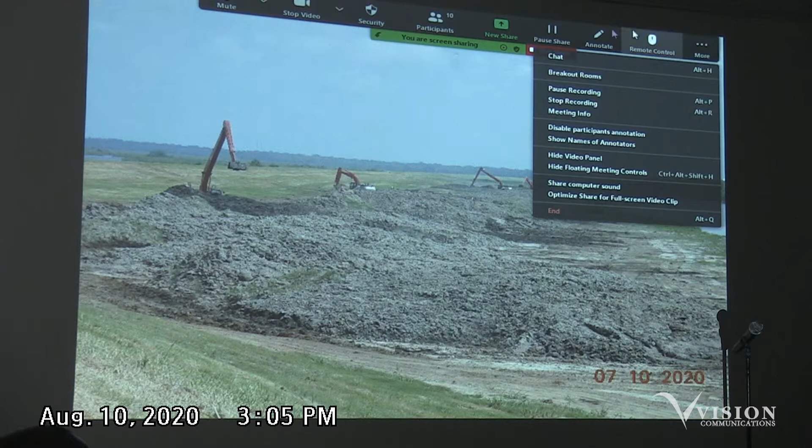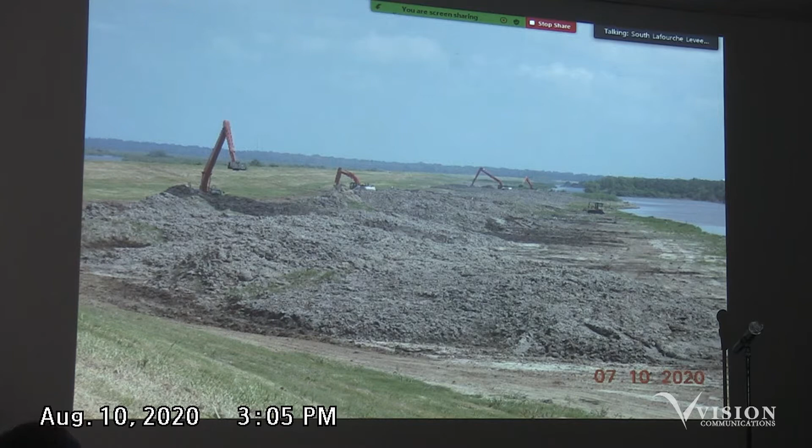Looking at that August 15th deadline, trying to get all the work we can. Here's a big job north of pump station number 2 Basin, where we're going to raise the levee. Some places are just 13 feet high, and we're going to eventually have them at 18. GIS is doing the work. We have a lot of dirt getting close to the levee, they haven't gotten it quite on top, but if we need to in a jam, we can get some equipment in there and get the lower areas at least up to 15.

That's where we're at.

This is Bully Camp working up. Our employees built this up to 18 feet. I wanted the contractors to see how it'll look and how the project might be, so they can give us a better view. That's at an 18-foot elevation, and when you start to climb up that thing you start getting out of breath. It's not nosebleed, but it's not that far from nosebleed. Here's the contractor doing that work.

Do we have any of the stuff from what Frank was talking about in your presentation? You know, I don't think we put any of that in. I was going to say if you did - we did last month, we showed a lot of that. Go back here to show us one.

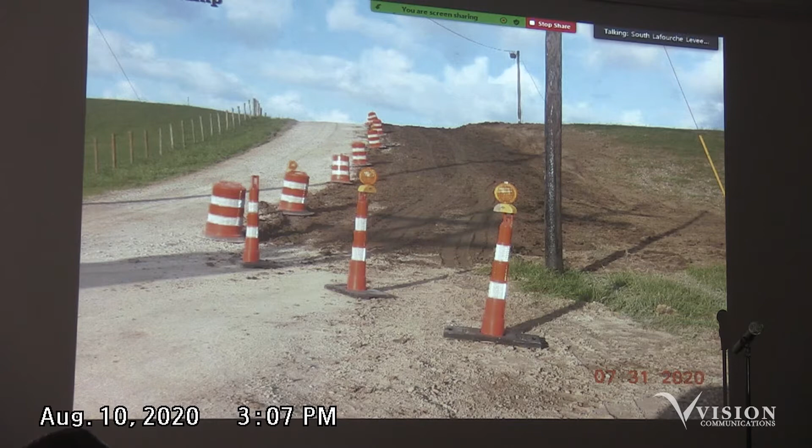You started on the left side now - oh yeah, okay good, I didn't go there this morning. So what that does, you can see the elevation to the right, that's approaching a 20-foot elevation actually. We're going to be going across to see - that's from the outside looking in, and you see they're on that same side. Here you see they're filling up a little bit more elevation, but you can look on the left - we are getting the work done on the left side too. The levee itself is a little bit low there, but we have a contractor working on that also.

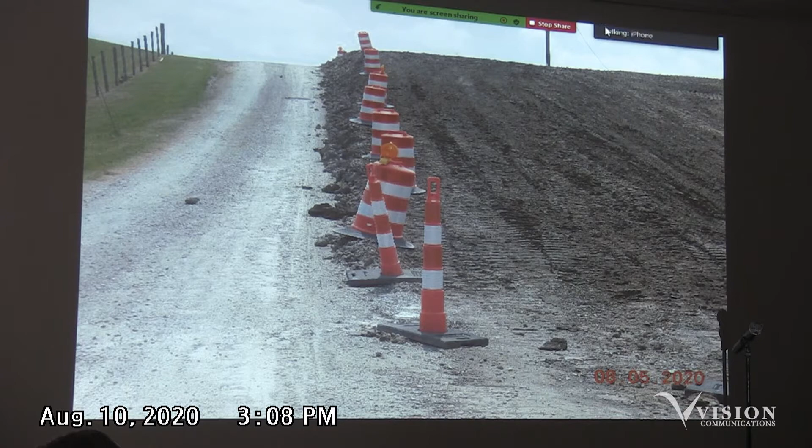Again, you can see the elevation that we're raising it to. Now this is the area south of Basin, and our employees are doing the work here - they're doing a really good job. That dirt, the big contractor placed it from the other side of the borrow canal to this side so we could use it for the construction. This is the project, the process going on.

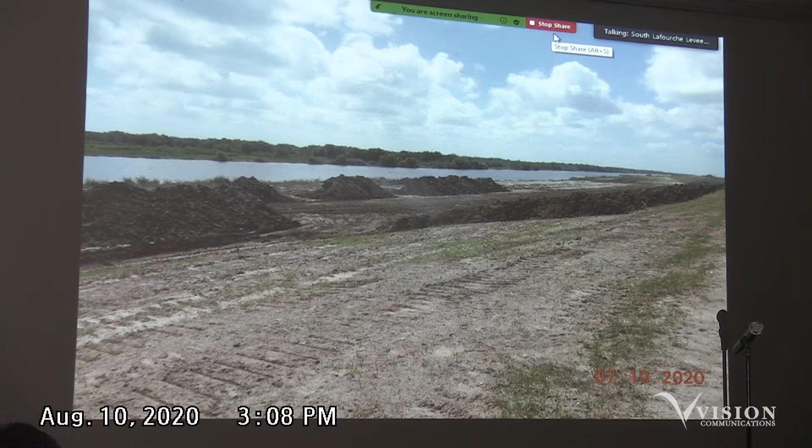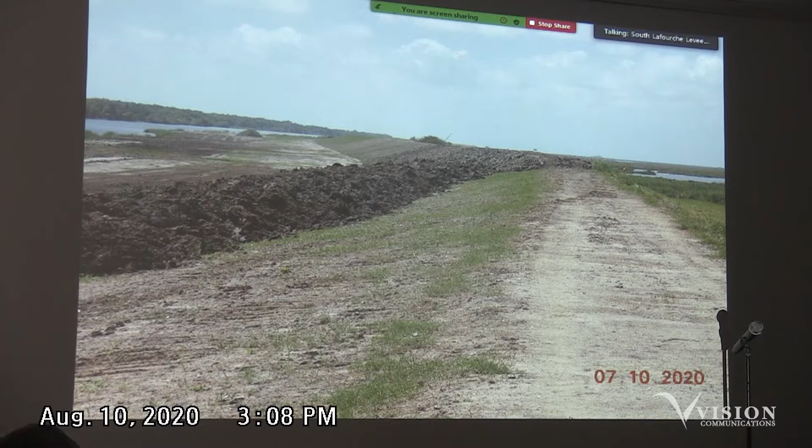Again, they relay the dirt to the top, and this is an 18-foot levee. Guys, beautiful levee, did a great job. That's all the way from the Golden Meadow Park all the way to Basin, and we're getting very close to completion.

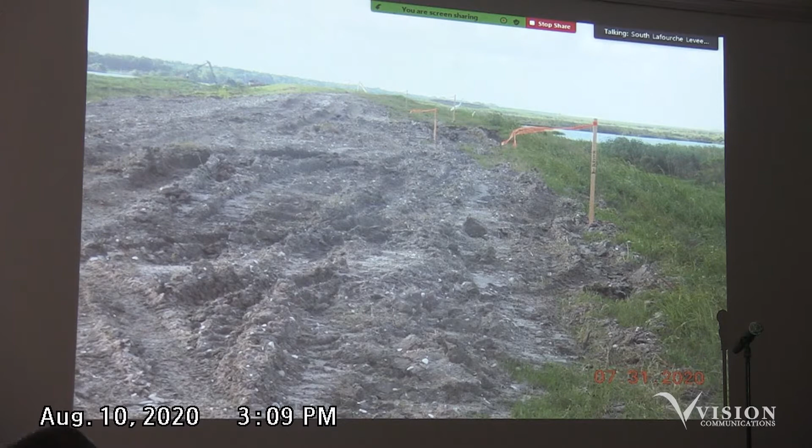And that's near the Basin area. At the stake right there, you'll see the mark, the black mark, it's at 16 feet. We'll get this one at least up to 16 in this area, and we should get there before September 1st. Just something we're working on - again, our guys doing the work.

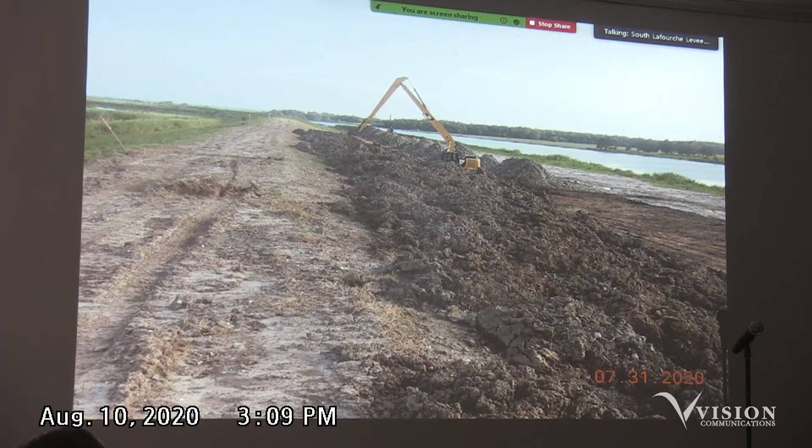Levee to the side - our guys move it to the side of the levee, they got our bulldozers to shake it, put it on top.

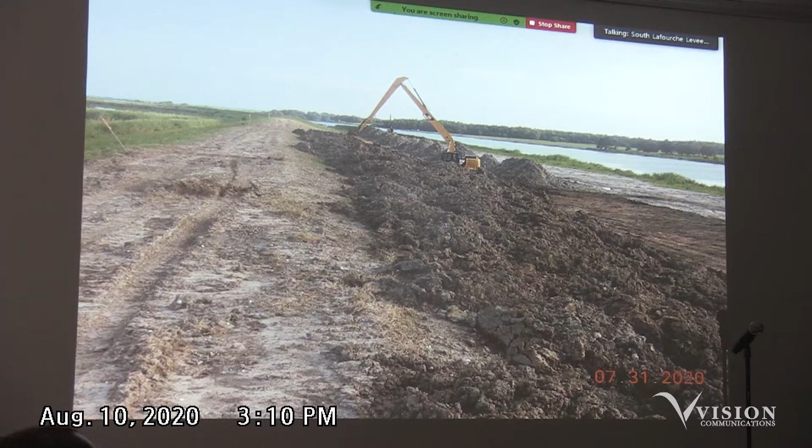On this project, every project we try to rehabilitate, we try not to work on the unprotected side, the side facing the water. We try to move the center line a little bit to the right. In other words, we don't have to grub the outside - it's compacted, it's got grass on it, a storm hits and it's in great shape. If we don't have to do that, that's fantastic. We just follow the angle up, so the center line of the levee moves a little to the right, but we have good compacted soil and grass on that side. That's always our first way of trying to do that type of work.

And then our guys are going to put the dirt on top and shake it. This is our crossing behind here.

We're going to put some culverts just like we have in Bully Camp, same size. But it's also there to help block some of that water.

If we get a consistent north wind blowing this channel - and this channel goes about 18 miles from the Golden Meadow area to Larose - that water can get stacked up in Golden Meadow, where the houses are a lot closer to the back canal than they are in the upper area. So what this does is slow down what they call a seiche effect, the wind stacking up the water on the south end.

This is helpful - Bully Camp is helpful, and we have a pipeline crossing a little bit south here, which is going to slow down the flow of the water from just wind.

For Hurricane Cindy - if you remember, that was also in 2005, on July 5th - it was a tropical storm, it got into Barataria Bay, and then the wind blew out of the north for 6 hours. It actually pushed the water level in the bayou where it was over the little wall in Golden Meadow. This is no rainfall, this is not hurricane water - this is just the wind that rose the bayou level 2.5 feet higher in the Golden Meadow area.

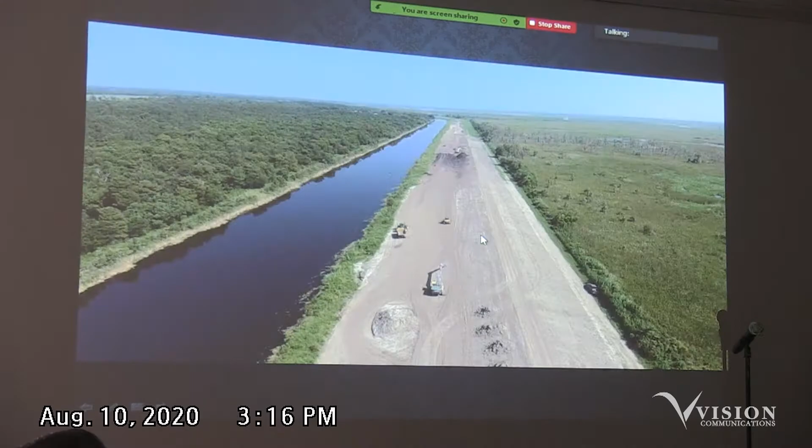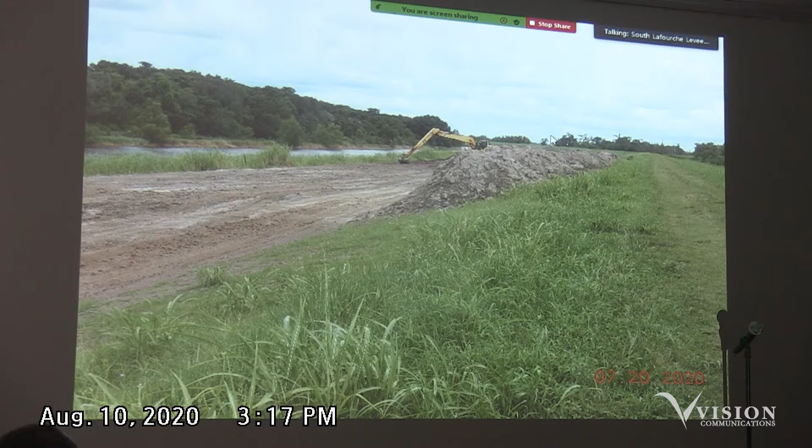Here's the ground level, and it's got to work in the top. Again, just relaying it - we had a contractor place the material from the borrow canal onto the toe of the levee, now we have this contractor moving it. Also, by moving it a couple of times, you get better compaction for a better levee.

And here's the marsh on the outside. Man, it used to be like this back in the 50s - the whole system would have marsh like this, but this is one of the few areas left that we have good solid marsh on the side. We wouldn't have to worry about that wave action and adding stuff. Here's a tree line area.

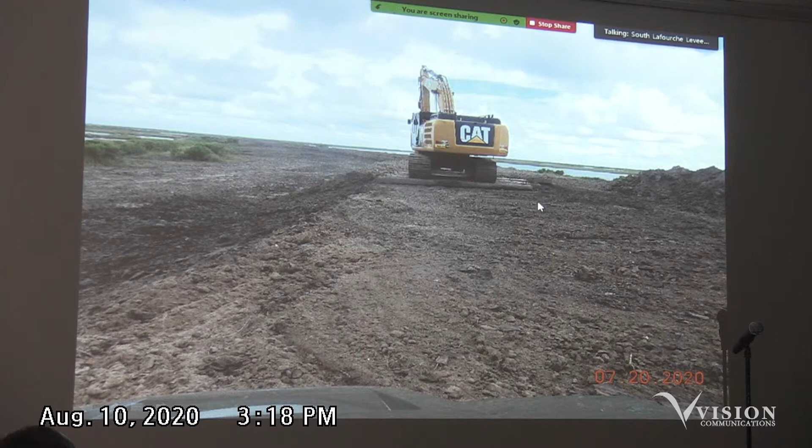So this is material that was dredged from here down to about -15 and placed up here. Thinking about this, fish used to live on this dirt when it was in the canal just a year ago, and now we got it up there to stop the water from going over. This is good progress they're making in this area.

This is the mitigation area at the corner of the Paul Dufresne Farm, section L with Morganza and our levee, and this is outside of the containment. We had an area where we put some hay bales to stop the water and keep containment of the material being dumped over here, because this is the marsh we have to mitigate. Everything you see that's dirt now, that's all open water. It kept leaking out, and had some extra material, and the way it worked out, we've got everything filled in here, and we're gonna make a whole bunch of new marsh on the outside of the containment, which is good for everybody.

Here we try to contain this pipeline canal that just keeps continually going through it. But by next year this should all be green and a real good mitigation project, and it benefits the wildlife but also helps protect the toe of the levee.

Again, here's the outside the system, here's the inside, and this is the heart of it, and it's mostly dry.

Outside, here again is the containment. And this is the little levee, no, this is our levee. This is the different levee, section L for Morganza. And you see this is the corner where we have all the material placed. Good job.

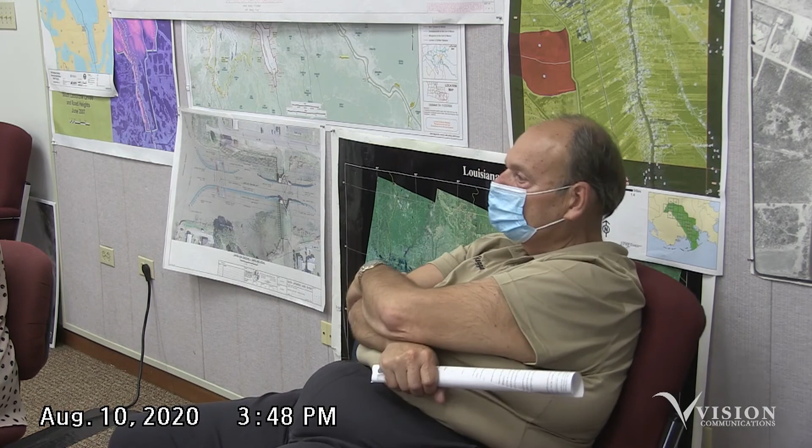You need a motion on that? I think we need a motion to authorize that. You heard the recommendation of the attorney to authorize $8,860 for permit drawings. Moved by Roland Curall, seconded by Roland Guidry. All in favor say aye. Opposed? Motion carried. Well, I think that's it for me, Mr. Chairman.

Thank you, Stevie. Okay, legal permits and right-of-way, Mitch? I don't have any this month, Keith.

There was one, just an extension of a project we've approved before, a pipeline permit issue, so I'd like to go ahead and recommend we approve that. I heard a recommendation from our general manager to approve the extension on the previously approved pipeline permit project. Motion by Mac, seconded by Roland Curall. All in favor say aye. Opposed? Motion carried.

Okay, Mr. Board Attorney, do you have anything to report? No, sir.

Finance Committee? Mr. Vice President, the Finance Committee met, reviewed invoices, and recommends we pay all invoices as presented. You've heard the recommendation of our Finance Committee Chairman to approve and pay all invoices. Motion by Monty, seconded by Roland Curall. All in favor say aye. Opposed? Motion carried.